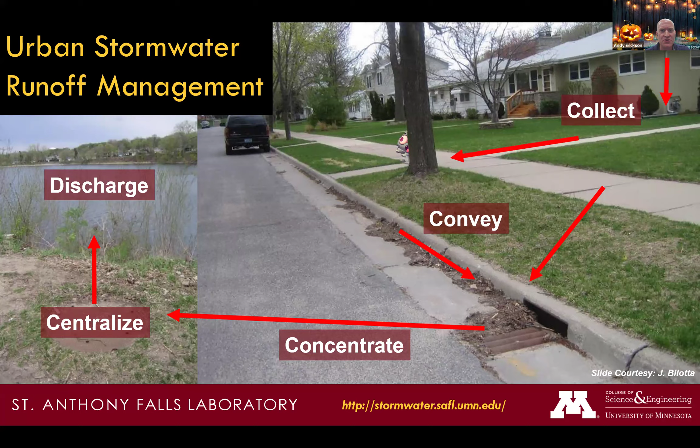But unlike wastewater treatment or other water treatment systems, it doesn't go to a treatment plant. It actually goes to dispersed stormwater treatment practices. And these stormwater treatment practices look different, and they go by many different names. You might know them more as BMPs, or best management practices. You might hear stormwater control measures, green infrastructure, green stormwater infrastructure, low impact development, and a few other names that are used in other parts of the world. But in reality, they're really just stormwater treatment practices.

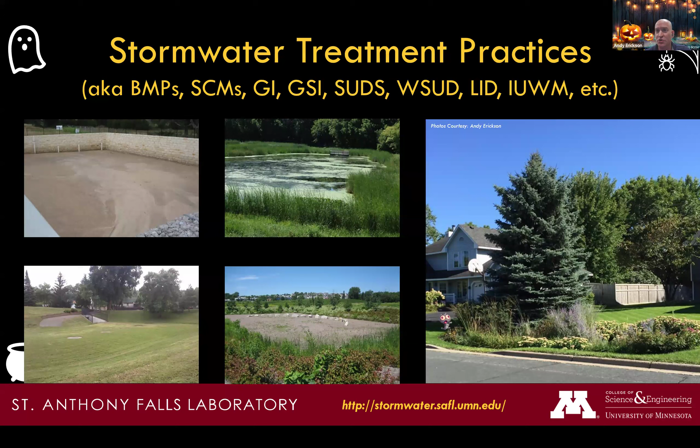They're different ways that we capture stormwater runoff and treat it to remove pollutants and to reduce flooding. We are also trying to mimic or restore some of the natural hydrology that was there before we created all the impervious surfaces that we find in our urban landscapes. So these practices are doing a lot of different things, but they are distributed throughout our landscapes. And just like anything else in our lives, we have to do maintenance to ensure that they continue to operate properly throughout the future.

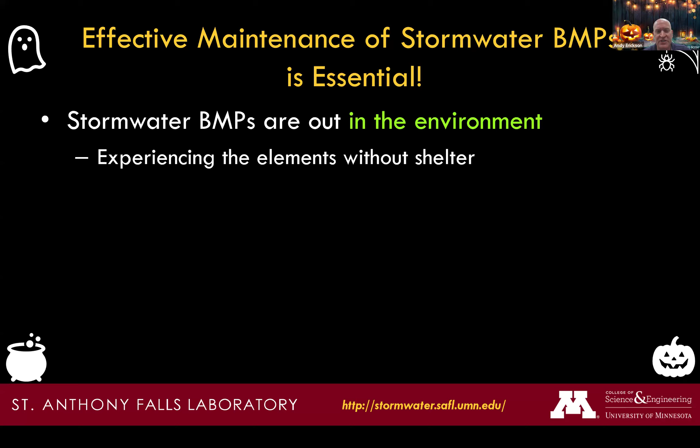So again, one of the things that's different about stormwater practices versus other types of treatment is that they are out in the environment. They're not sheltered or protected inside a water treatment plant. They're out in the landscape, and so they experience the elements of the weather without shelter. And there are many, many types of stormwater BMPs out there, and they come in many shapes and sizes. And there's many locations, a point that Millie was very adamant about, there's many of these stormwater BMPs throughout the urban landscape. If you imagine trying to do maintenance on many different sites all over, you can quickly see that's going to be a challenge.

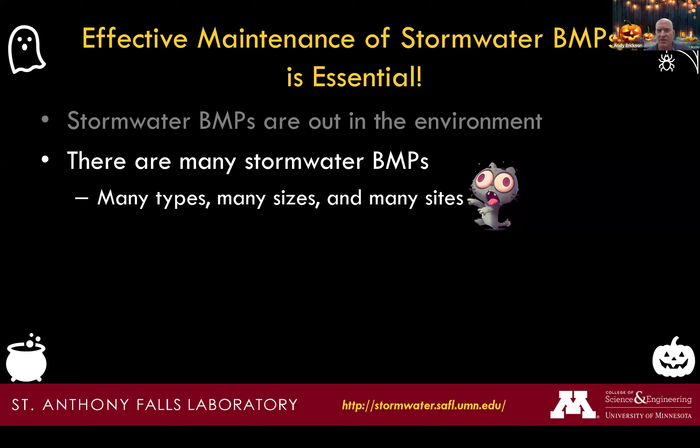And again, unlike a wastewater treatment or drinking water treatment plant, stormwater treatment is actually passive. It's installed in the landscape, and we as stormwater managers hope that it continues to work. There are no operating staff on site to see when these things fail or what's causing them to fail. We have to go out and do inspections. We have to be proactive in our inspections to find when these things start to fail.

So that's a challenge. And as you can imagine, that will also increase the cost of maintaining our stormwater treatment practices, because we have to make extra trips out to these very dispersed practices throughout the urban landscape. I won't get into it today, but it is part of the manual. The cost goes up considerably. Depending on the size of the practice, your total maintenance cost might become more than your original construction cost within 5 years of the life of that practice.

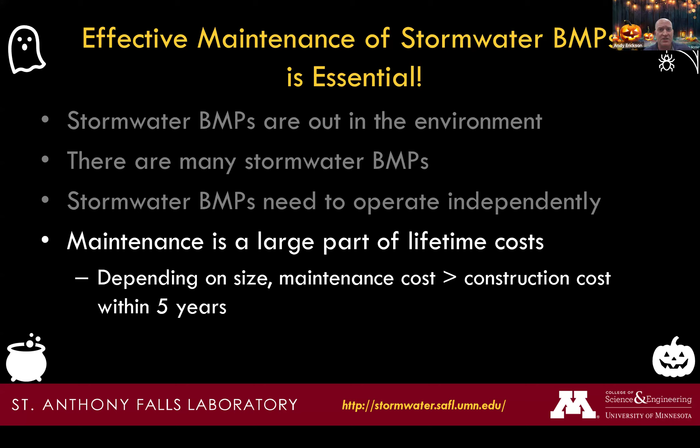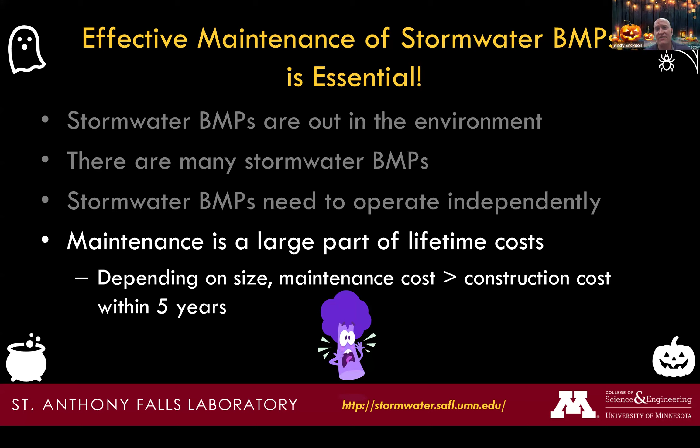And many municipalities are struggling with that because there's budgets for building new practices, but there's often limited budget for actually maintaining them. When I was explaining this, Herbert just started to freak out. He couldn't imagine how he's going to pay for the maintenance of all of these stormwater practices within his jurisdiction. Some cities can have hundreds or even thousands of stormwater treatment practices within their purview. So thinking about maintenance costs is very important, and optimizing maintenance can create lots of cost savings for something that already doesn't get enough money as it is.

So you might ask, well, why would we need an inspection and maintenance resource guide? Aren't there already tools and training and guidance out there on this? And some might say, well, what about the Minnesota Stormwater Manual? And of course, the Minnesota Stormwater Manual is out there. This is the state design guidance for stormwater practices. It does include some maintenance guidance, but also all of the regulatory requirements around stormwater.

And the manual actually has many, many details, but it can be a bit dense. Last I heard, something like 8,000 individual web pages. This is a wiki manual, so it's an online interactive manual. And something like 8,000 pages or more make up the Minnesota Stormwater Manual. So sometimes it can be hard to find what you're looking for.

And MnDOT and the Local Road Research Board, as a consequence, funded the development of an inspection and maintenance resource guide, originally in 2009, and then provided additional funding for us to update and upgrade that manual to incorporate everything that we've learned since 2009 on stormwater practices, inspection, and maintenance.

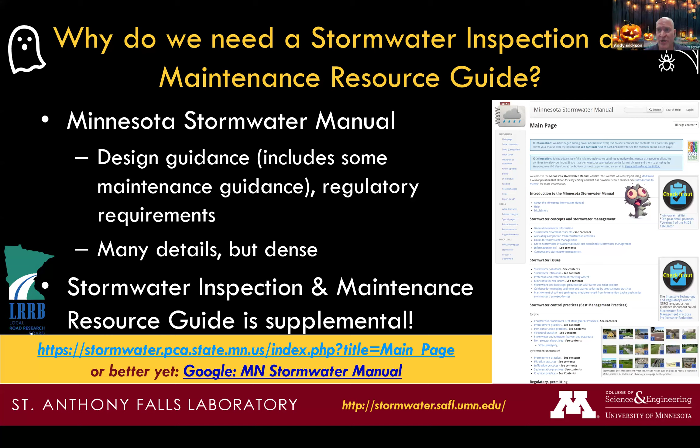So to do that, I do want to make sure that we're all talking about the same thing when we say operation and maintenance, or inspection and maintenance. And really, the operation and maintenance of stormwater treatment practices boils down to 3 things. There's inspection, where we actually look for problems. This is a very quick, simple, visual assessment to schedule and select the maintenance that's needed for the practice. Ideally, you could do this with field crews.

We've actually done some surveys, and some of this information is also in the resource guide. We did surveys to understand how people do inspections and what's needed for inspections. And we found that inspection itself is very simple. So you can have interns during a summer. You could have a whole field crew of interns that are just going around to do inspections. They would learn a lot about stormwater treatment, and you would learn a lot about the function of your stormwater practices and which ones need maintenance sooner rather than later.

And you may find that some of these practices also need further assessment. You may need to do some additional measurements to determine the performance of the practices, because the inspection might say, "Ooh, it's not quite working right," but you might not know why or where. You may want to hone in on the maintenance on certain portions of the practice. And that's where you can do assessment, whether that's point measurements or other data gathering to find out what specifically is failing within the practice so that the maintenance you do perform is specific to the problem and getting at the root cause.

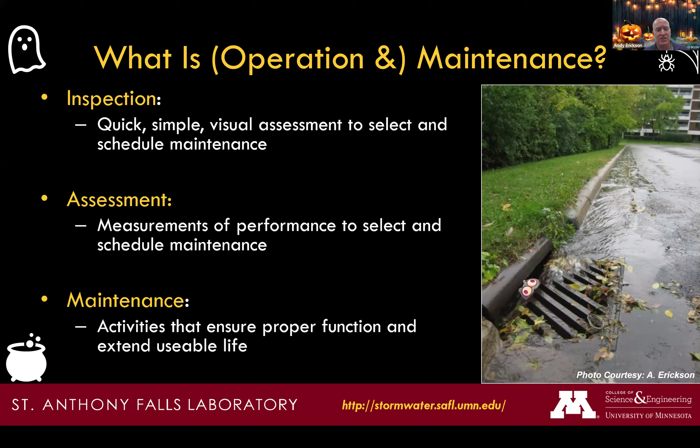So to understand maintenance, there's really kind of three categories of maintenance, and we built it as a pyramid because at the foundation of maintenance is what we call routine maintenance. Routine maintenance are practices that you do on a relatively frequent basis and on a regular schedule. So for example, you might be doing monthly routine maintenance or maybe twice per year or quarterly. It might even be every other year. It really depends on the practice itself and what maintenance it is. But routine maintenance is a regular occurrence that's relatively frequent compared to other types of maintenance.

Things like visual inspections. We recommend visual inspection is done at least every year on all of your stormwater treatment practices. But really often we find that litter and debris removal kind of becomes a routine maintenance activity. It builds up pretty consistently and that should be removed. And vegetation management and ground cover management also is a regular, relatively frequent, routine maintenance activity if you want the practice to maintain its function, especially if it's vegetation-based.

But then there are other maintenance activities that aren't as frequent or aren't as regular. You might say these are as-needed maintenance activities, and that's what we call non-routine. These are things that you would do only when you need to do it. It's kind of the old adage that if it ain't broke, don't fix it. So these are maintenance activities you do when needed. Visual inspection will identify when these maintenance activities need to be done. And they'll include things like cleaning out trees and sediment from the practice, any structural repairs, or any partial rehabilitation.

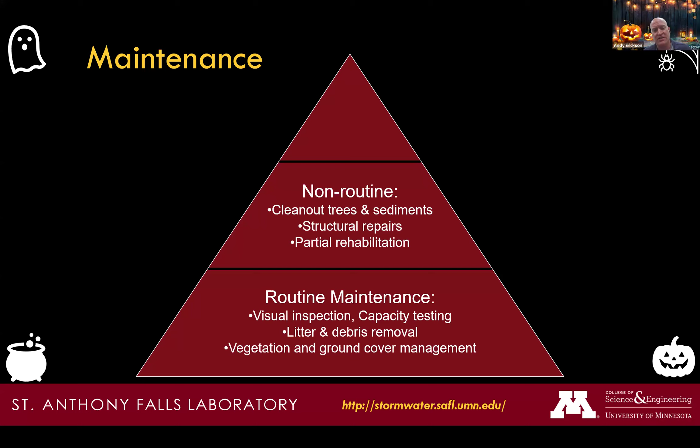But if we put together routine and non-routine maintenance, really, when you're doing that, you're doing preventative maintenance. And what are you trying to prevent? You're trying to prevent major maintenance. You don't want to get to the point where your practice is completely failing. And if you're doing routine maintenance on a regular basis and non-routine maintenance when it's needed, oftentimes you can push off major maintenance or even maybe prevent major maintenance indefinitely. That's the ideal situation. But obviously, we still see failures.

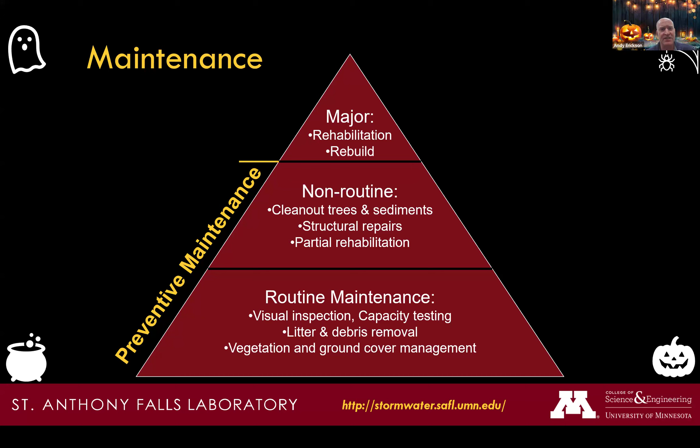So this is the maintenance pyramid. There are instructions in the manual on how to do all this. Lots of details, lots of guidance on what this means for each individual practice.

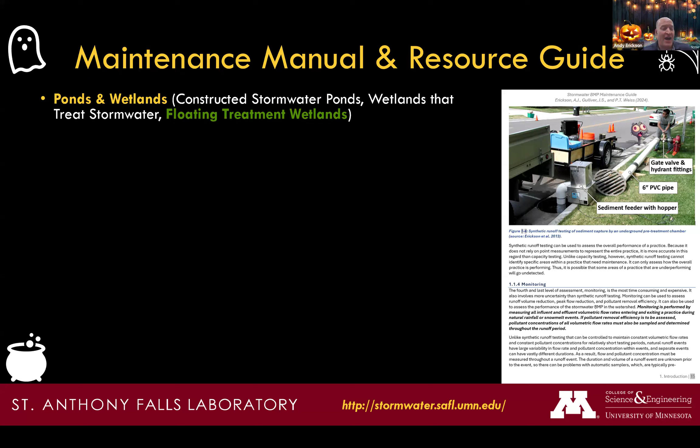So what are you going to find if you go into the manual and the resource guide? Here's a little screenshot of what it looks like. You're going to find a lot of sections on different types of practices because the maintenance and inspection is specific to certain practices. So, for example, you'll find a section on ponds and wetlands. One of the things we've added since the 2009 report is the floating treatment wetlands as a new section within

this manual now. We have a section on underground sedimentation practices, which includes a variety of small and large practices that are primarily underground for settling particles. We also have infiltration practices. One of the new adds in an update to the manual is the tree box and tree trench, which have certainly become more prevalent in our urban landscapes. We can see it in many of our developments and stormwater treatment implementation projects.

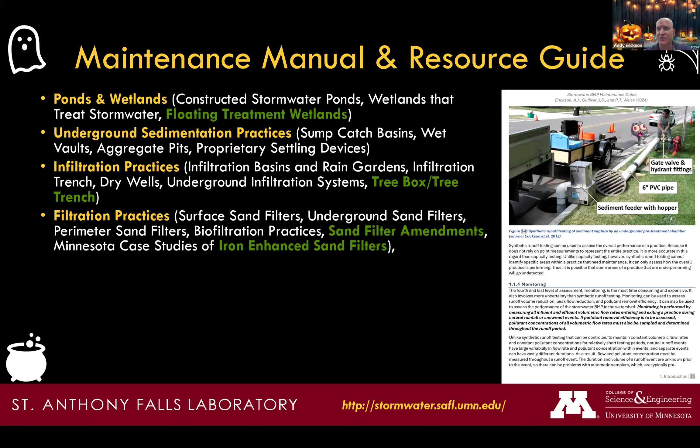We have filtration practices where the new adds are amendments to our sand filter designs. So amendments in our sand filters can actually improve performance by capturing more pollutants. But that also means that's a potential failure mechanism. That's a potential component within the practice that will need maintenance. And you may need additional specific assessment to determine when those amendments are used up. And again, that's all guidance that's in the manual now today.

We also have some existing Minnesota case studies of iron enhanced sand filters. So coincidentally, the previous version of the manual was released in 2009. We, being Minnesota in general, installed the first full-scale iron enhanced sand filter, which went online treating stormwater in 2009. So at the time the manual was written, iron enhanced sand filters were an idea. They were a concept. They were results from research. But starting in 2009, they became a full-scale practice. And today, there's over 170 full-scale iron-enhanced sand filters in Minnesota and beyond. So it's important to understand what inspection and maintenance activities are needed to keep them functioning in the long term.

But we also have a section on bioretention practices, which includes rain gardens and infiltration basins. A new add to this section is the bioswales, which really are essentially drainage ditches, but they provide a lot of stormwater function, both in water quantity, slowing down the flow and providing infiltration, but also water quality in reducing pollutants. And they do need specific maintenance to remain functional in the long term. We also have full depth permeable pavement as a section within the manual, and this includes both concrete and asphalt, as well as interlocking pavements, block pavers, and things of that nature.

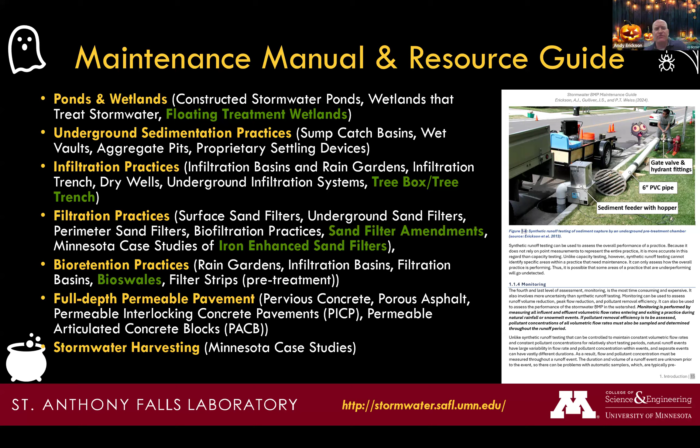So when you look in these sections, there's a lot of sections here and a lot of different types of practices. What are you going to find in each of these sections? You're going to find the benefits and the limitations of each of these types of practices. You're also going to find guidance on how to do assessment, whether that's visual inspection or point measurements such as capacity testing or field flood tests such as synthetic runoff testing or monitoring. You will also find maintenance triggers or the factors that are affecting performance.

If you see a practice when you're doing a visual inspection that's not working well, you can use that assessment, whether it's visual inspection or capacity testing, to determine why it's not working well. And that will lead you then to what maintenance needs to be done. And that is what's through the rest of the section. It talks about what maintenance is needed and what you might expect to pay for maintenance.

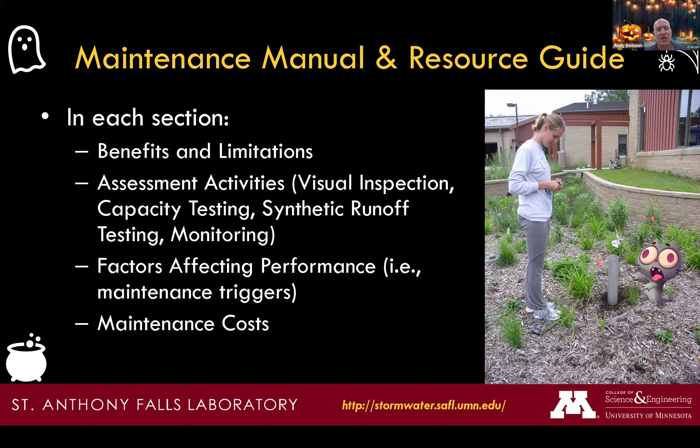And the reason maintenance costs are important, as I said in the beginning when I was explaining this to Herbert, is that maintenance costs are often under budgeted. So if you want to have a budget that allows for proper maintenance of your stormwater facilities and infrastructure, you need a guide. You need expected maintenance costs to be able to develop a good budget. And so we try to provide that in this resource guide so that municipalities and other jurisdictions can begin building that into their budgets and then realistically be able to cover proper maintenance for their practices.

But something else that's new in this particular version of the manual is a section on what we call management objectives. And really what we're trying to get to here is how can you meet your stormwater management objectives? You might say, well, I don't even know how to pick a bioretention or a wet pond or a sand filter. Or, oh my goodness, I just came into this job. I have all of these practices. I don't know what they're trying to do or why I'm trying to optimize them.

But I know in my area, because I have TMDLs, total maximum daily loads, I know in those reports, we need to reduce phosphorus. So my goal is to reduce phosphorus. What this section does, if you look in the meeting stormwater management objectives, is you can look for the section on phosphorus reduction, and it will tell you then, what do you need to focus on within your stormwater treatment practices to maximize and optimize the phosphorus reduction for you to meet that stormwater goal. It's a very different perspective on how to look at stormwater treatment and your stormwater system as a whole.

But it's not just phosphorus. So phosphorus is an example, but Millie was very adamant about saying that we can replace phosphorus with things like solids, phosphorus, nitrogen, metals, chlorides, pathogens, organic chemicals. You might have a different priority from phosphorus, and that's okay. There are sections of all of these pollutants within the stormwater management objectives section.

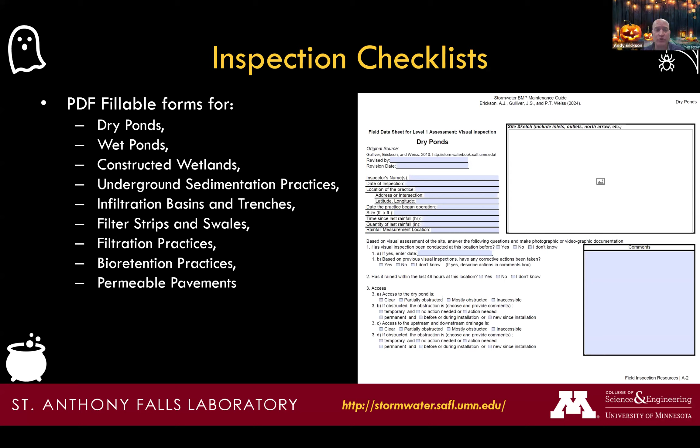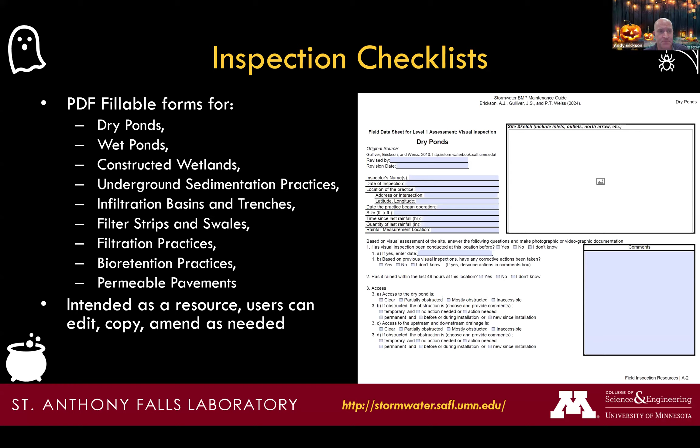They are available for all of the different types of practices that you will find in the manual, but they are intended as a resource. This is a resource guide. So users, that's you, can use them, you can edit them, you can copy them, you can amend them or change them to suit your needs. They're not intended to be a static thing. They're intended to be a resource that you can use and adapt within your jurisdictions for your needs. So please do so. We do ask that you give a little bit of credit where we developed it. So you'll see here on the inspection sheet that we look at here shortly, that it does have the original source, but it gives you a place where you can take credit for your revisions and your changes to that. And then that will lead then to maintenance tables.

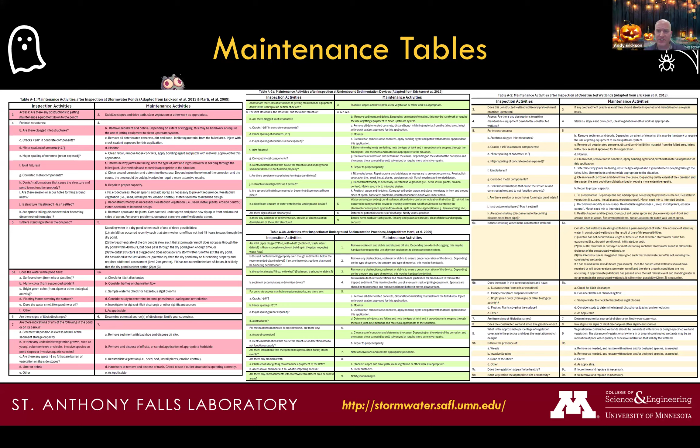Now, I don't expect you to read this. We're actually going to look at an example of this, but there are maintenance tables that go along with every single inspection form. So when you answer the questions, then you would go to these tables and look for your answers and determine what maintenance you need to do in response to what you observed in the field. So this is kind of an example. Let's dive in. Let's really get our hands on this.

And to do that, in honor of Halloween, we are going to do a spooky choose your own maintenance adventure. Many of you, if you're of my age and generation, you might remember the Choose Your Own Adventure books, where you would start reading and then you would get a choice at the end of a chapter, and you could choose this or choose that. And depending on what you chose, you would go to a different page. We're going to do that today with our maintenance activity.

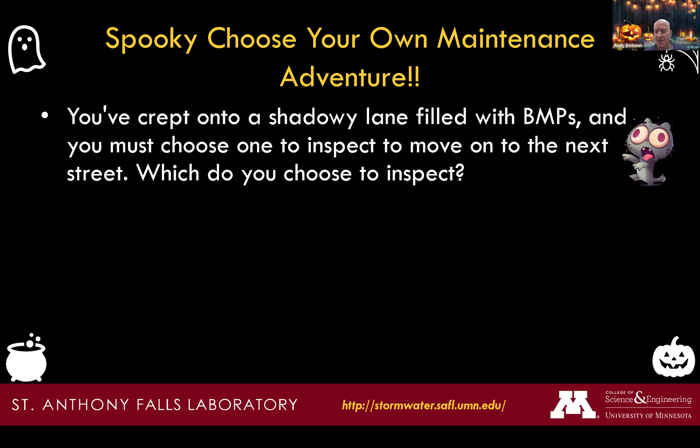And so what we're going to do, here's the scene, if you will. You've crept onto a shadowy lane filled with BMPs, and you must choose one to inspect before you can move on to the next street. So which will you choose? Don't be too scared. It's okay. Millie is here to help us. And actually, Millie's friend Billy, the zombie dog, is also here to help, because there's a lot of options here.

And I'm actually going to open up the poll and get this launched so that you can all vote on one of these practices. So what you're going to do is you're going to pick whichever practice you would like to see us do a little inspection and maintenance adventure on. And we're going to find out what your preferences are. So take a look at that. I know there's a lot of options. Billy is here to help us. Millie is here to help out as well. So choose which of these you would like us to dive into and take a look at.

Oh, we're doing very good. It's a tight race. There's actually a lot of choices here. I see a lot of people picking a lot of different kinds, which is great. Again, we're not going to be able to look at all of them today, but once you download the manual and take a look at it, if you have any questions on any of them, please feel free to reach out and we will be happy to answer those questions.

My goodness, we have 100%. Not quite 100% participation. We have 111 responses. We have 82% participation. So I think they've leveled out so far. So we are going to end the poll here, and let's share results. Let's make sure I'm doing this properly. Hopefully you are all seeing the results.

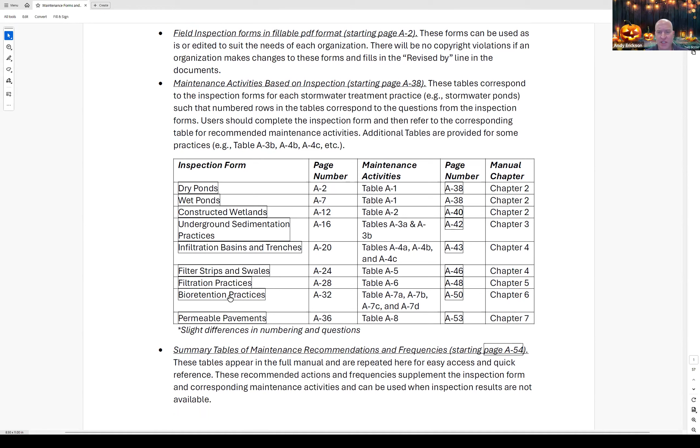You will see here we have our field inspection forms in fillable PDF format. We have our maintenance activities based on those inspection forms. And at the very end, we also have some summary tables of additional maintenance recommendations and frequencies. But we're going to jump ahead right now to the bioretention, our number one spooky pick here. And we're going to zoom in a little bit. I want to make sure you can read this. Nope, wrong way. Here we go.

So in the bioretention sheet, you can see this is all PDF fillable. So if you make changes to it, you can fill that in. I've already pre-filled a little bit of data here, but you can type in who's doing the inspection, what's the date, where is the inspection happening, and then you could go through the form. So has visual inspection been conducted at this location before? Yes or no? Maybe no today.

Based on that, has any corrective action been taken? No, of course not. Has it rained in the last 48 hours? I don't know where you all are today, but for me, it definitely rained on me today. So I'm going to check yes on that box. And then this practice does have pre-treatment, and you might want to add notes here about what your pre-treatment practices are, what you're noticing within those practices, et cetera. And even at this top form, you can take a picture of the site and upload that into the form so that it's included in your inspection.

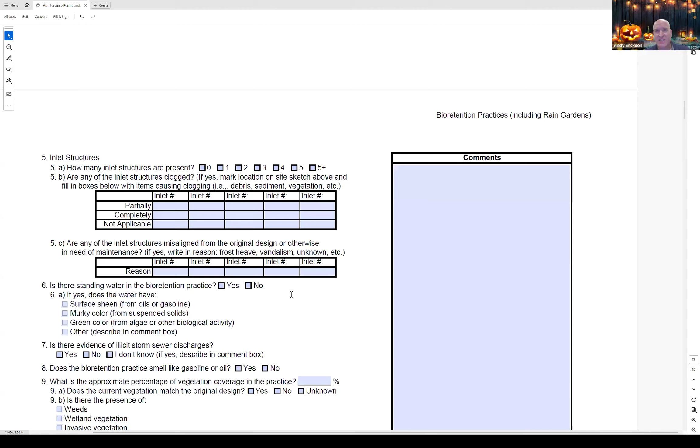And ideally, you would pull this form out and save as, because you're going to reuse this form over and over again. So you're going to save a blank one that you can continually update for each practice and each time you're going out to the site. Normally these inspection checklists are roughly between 10 and 15 questions. It will ask about inlet structures. It'll ask about illicit discharge. It'll ask about vegetation cover for a practice that has vegetation.

Bioretention certainly relies strongly on its vegetation, but it'll also talk about erosion, banks. It'll talk about the outlet structures and overflow structures or bypass. But ultimately, you will get down to the inspector's recommendations at the end of the form. With some experience and exposure to this, you'll be able to answer these questions very quickly and assess the practice to determine, you know what, this practice needs maintenance right away. It has to happen before it rains again, or we could have a catastrophic failure. Or maybe not that.

Maybe it's not that high risk before the next rainy season or within a year or two. And of course, you can be adding notes throughout. And then there's a section for the summary at the end. So once you do that, and again, this can be done by field crews with interns. Once you're done with that, you can actually then go to, for our bioretention practices, we can then look at

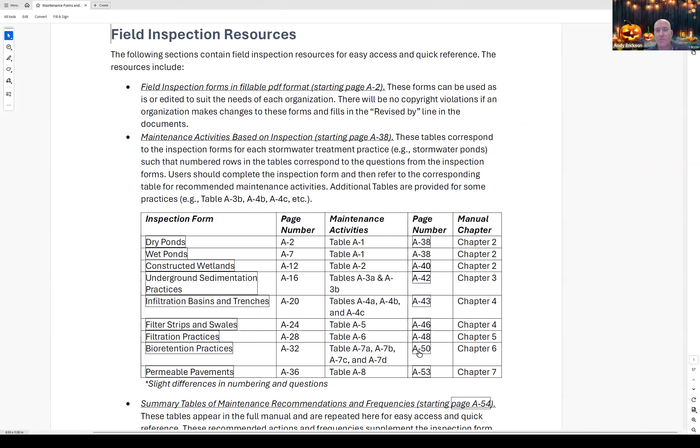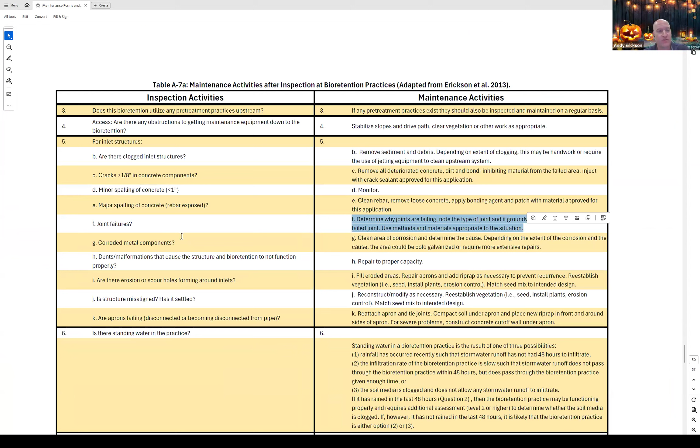what maintenance is recommended. And again, I'm going to zoom in here so we can read this a little bit better. But what you do here is you look at your questions, and then depending on how you answer, you can see the maintenance activities that you would want to recommend for the maintenance crews to do to address that issue. So for example, maybe you notice joint failures. Well, then you can figure out which joints, why the joints are failing, which ones are failing, the types of joints, et cetera.

Erosion or scour holes, you want to make sure and fill those in. You want to repair any erosion control that you might need in place, et cetera. And again, you can go through these to really hone in on what maintenance is needed and when the maintenance is needed. So again, there's some indications here about timeframes of when you might need maintenance. So that's essentially what you're going to do. And again, it's very specific. It's very tied into both the inspection and your sites. So everyone's going to be different. When you do inspection and maintenance of stormwater treatment practices, it's literally a choose your own adventure every single time.

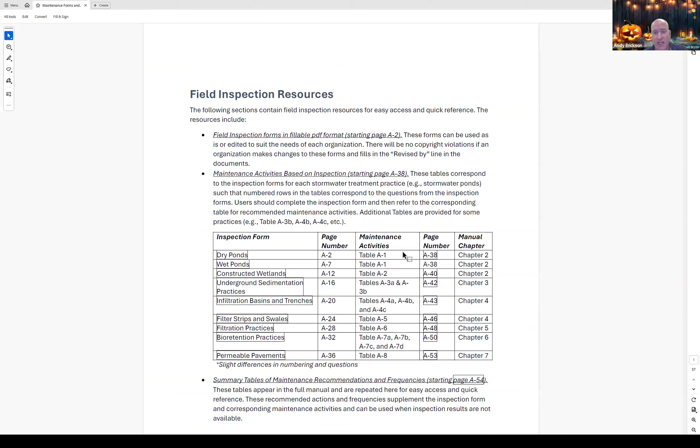So that's really kind of a preview of what to expect. That's how to use the guide and how to use the inspection forms. Let's go back to our maintenance adventure. And that's really all it is. It's really not that hard. It's not that scary. You shouldn't be afraid of doing this. It's something that can be done relatively easily and quickly, but it can really provide a lot of benefit. And if you optimize that process, it will save you money in the long run. So I want to sum up.

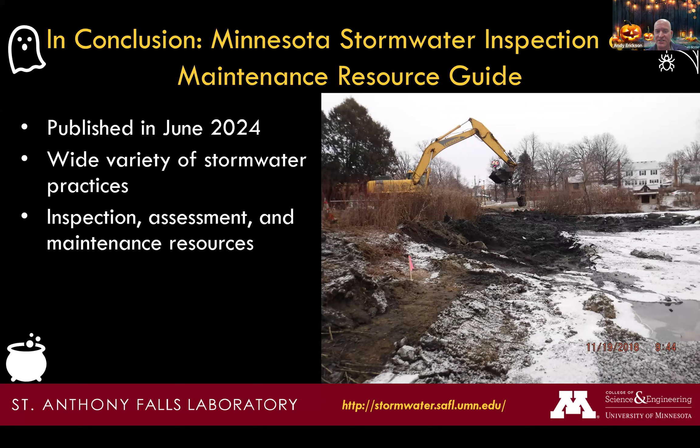So in conclusion, the Inspection and Maintenance Resource Guide was published this past summer in June. It is online. There's a link to the CTS website where you can download that. Hopefully somebody can drop that in the chat if it's not already there. Please check it out. It does have a wide variety of stormwater practices. It has inspection, assessment, and maintenance resources, PDF fillable forms, which we just looked at, maintenance triggers, activities, frequency, and cost.